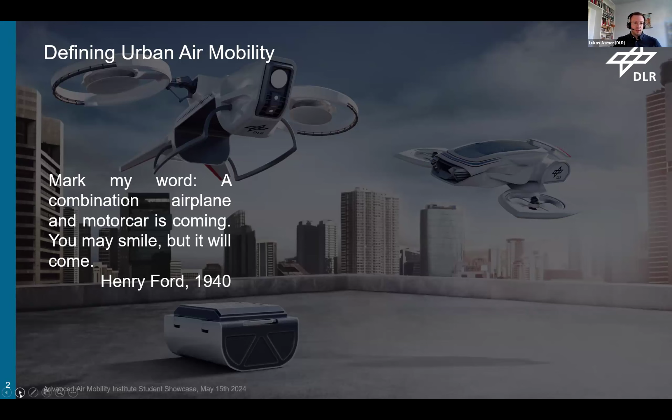I think most of you will know it, but I will summarize the whole topic of UAM with a short definition of urban air mobility by the EASA, that's the European Aviation Safety Agency, and the EASA defines UAM as follows: UAM is a safe, secure, and more sustainable air transport system for passengers and cargo in urban environments enabled by new technologies and integrated into multimodal transport systems. The transportation is performed by electric aircraft taking off and landing vertically, remotely piloted or with a pilot on board.

And they further add, commercial operations in the EU cities are expected to start around 2025 with delivery of goods by drones or transport of passengers by piloted aircraft.

And I also think many of you will know this. This is the Gartner Hype Cycle of emerging technologies. The Gartner Hype Cycle shows which phases of public attention a new technology goes through when it is introduced, and you can use it to evaluate new technologies. And as I already said, urban air mobility seems to be a real hype topic in the past years, after some well-known publications in this field, like the Uber Elevate paper, or some publications from consulting companies.

In 2019, the Gartner Hype Cycle lists flying vehicles as an innovation trigger topic. And in the years after, the news about urban air mobility multiplied, the expectations became greater and greater. And currently, I would say we can see urban air mobility in this trough of disillusionment. The picture is slowly becoming clearer. We have to realize that not all expectations maybe can be achieved, but after this trough of disillusionment, innovations can come to a slope of enlightenment and will hopefully end in the plateau of productivity.

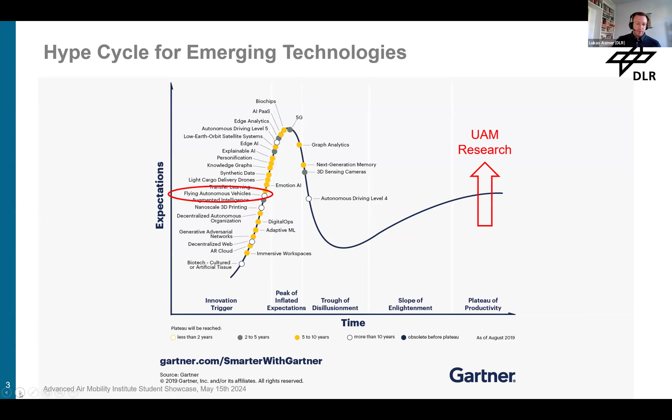And our goal at the DLR is to provide valuable contributions to better understand and design, to increase this plateau of productivity in the end. And therefore, to achieve this, it's important to view from a holistic perspective.

Because like any other transport system, it is a complex system of systems which is characterized by components that can interact in various ways. And the changes in one individual component can influence each other component in a positive, but also in a negative way. As a change in one component of a system can have an impact on the other components and on the behavior of the system in general, the system performance results from the interaction of all these components, with an impact on all relevant stakeholders like the users, the operators, the society in general, and also on the environment.

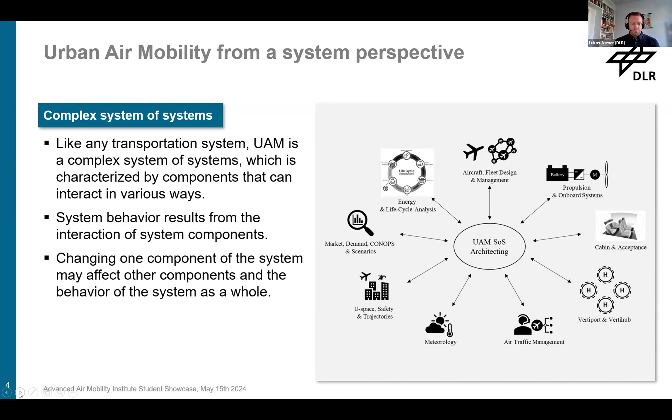In order to create a viable urban transport system, it is necessary to harmonize the individual system components like the vehicles, the infrastructure, and the operational framework, which, for example, includes the air traffic management. And in order to balance these interests of all relevant stakeholders, it is essential to compare the costs and the benefits when designing and evaluating this transport system.

The evaluation of benefits can include different aspects like the travel time or the travel speed, the mass efficiency, and the network capability. The cost on the other side may include the monetary costs, such as ticket prices for the users, but also the operating costs and investment costs. But they also consider external costs, which are, for example, environmental and social impacts, like noise pollution. And I think these external costs are a very crucial point in the assessment of new transportation modes.

In the end, by minimizing the costs and maximizing the benefits, a sustainable transport system can be created that mostly meets the society's expectations and requirements. And the challenge for us is to harmonize the system elements in such a way that the transport system is accepted by society. Therefore, the system needs to be affordable, accessible, safe, environmentally friendly, and economically viable.

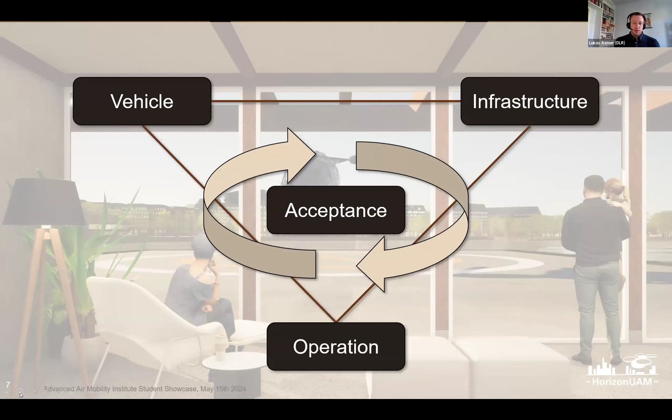The DLR has been researching various aspects of UAM, UAS, and unmanned aircraft for several years. But with the Horizon UAM project, we started the first interdisciplinary research project on urban air mobility, bringing together a lot of knowledge from different research fields to research single topics of UAM, but also UAM as a system. The project combines research about the vehicle, the infrastructure, the operations, and also public acceptance.

The main objective of the project was the assessment of opportunities and challenges for air taxis and urban air mobility concepts. The project brings together a wide variety of DLR institutes and departments to research the vision of urban air mobility.

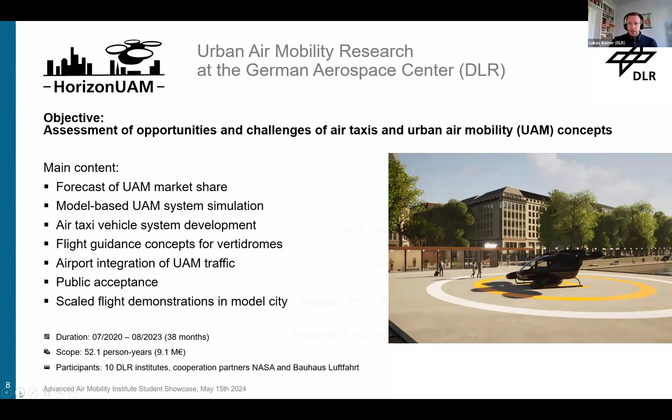You can find all these institutes here on the right-hand side. The project has a duration of 38 months and a budget of around 9 million euros. We also had two cooperation partners, NASA and the German aviation think tank Bauhaus Luftfahrt.

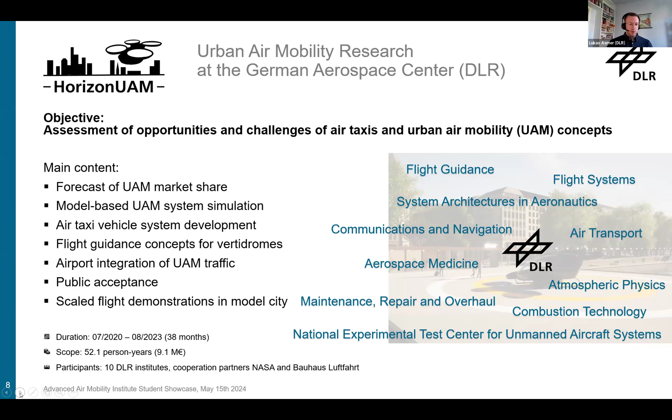In the following, I want to give you some insights into what we did in this project, and I will focus on our 5 main work packages.

I will start with the overall system simulation. This work package includes a lot of research on the operational and market development aspects, and we had 3 main working activities. We set up a system of systems simulation framework to evaluate the complexity of a UAM system and the interaction between different subcomponents.

Therefore we combined several tools we have at the DLR from different domains, like a demand tool, a vertiport tool, and the airspace management tool, and set up this simulation framework.

We also developed a forecasting method to estimate the global demand and fleet size, with a focus on different market development scenarios, and parameter studies where we evaluate the effects on ticket prices and vertiport density on the UAM demand.

We also looked at the economic viability of UAM to estimate the operating costs and ticket fares for 3 representative UAM applications, like an intra-city use case, an airport shuttle, and regional air transport.

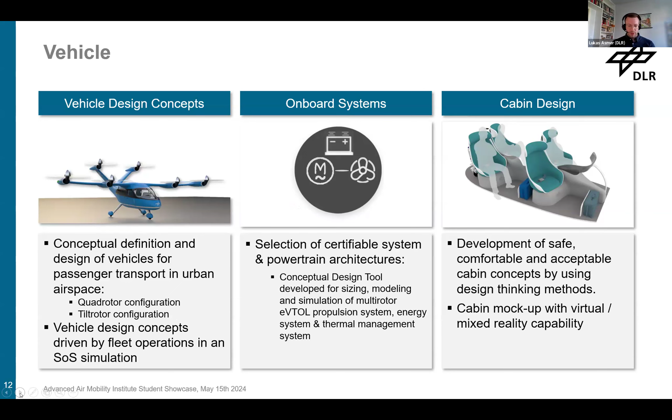Then we will come to the topic of safe and secure operations. I think safe and secure operations are one of the most important elements in aviation and also for UAM operations.

Since vehicles are supposed to fly autonomously in the long term, we put a lot of effort into the field of safe autonomy. A machine learning use case was developed for human detection, for example, on a vertiport. The main issue here is how machine learning can be made certifiable.

Within the Horizon project, we also developed DroneCast, a drone-to-drone communication system for collision avoidance in urban airspaces.

We worked in the field of multi-sensor navigation to design a multi-sensor navigation framework for UAM, which includes the ground infrastructure and also onboard units for the multi-sensor navigation aspects.

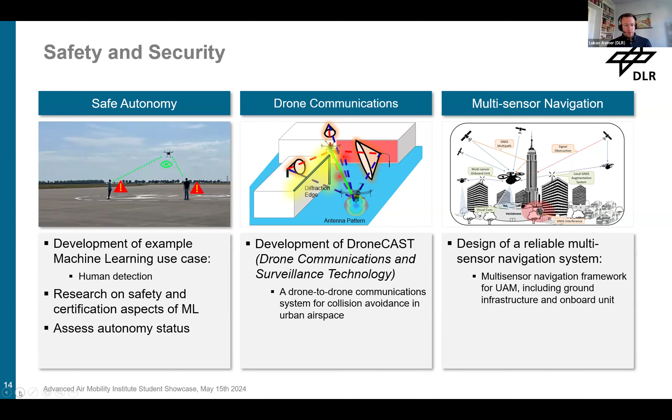Then I will come to the next main work package, and here I want to start with a short sentence which I read at McKinsey, and I think this statement summarizes the topic very well: to take off, flying vehicles needs first a place to land.

And so the topic about vertidromes, so that's a term we called vertiports and vertistops in the Horizon UAM project, are one of the crucial points for the UAM system. And in the project, we looked at different aspects.

The vertiport design: here we did fast time simulations of vertiport airside operations for different vertiport layouts. And we also developed the vertiport airside level of service framework to evaluate the different vertiport layouts.

We worked on the network management, where we developed and evaluated different network approaches, a slot-based approach and a trajectory-based approach. We also worked on network optimization under consideration of vertiport positions, available infrastructure, and infrastructure capacities.

And we worked on the integration of vertiports into airport environments. Here we did fast time simulation of the integration of air taxis into conventional runway systems. And we did real-time human-in-the-loop simulations where 10 air traffic controllers should integrate 44 conventional aircrafts and 15 air taxis per hour in an airport runway system.

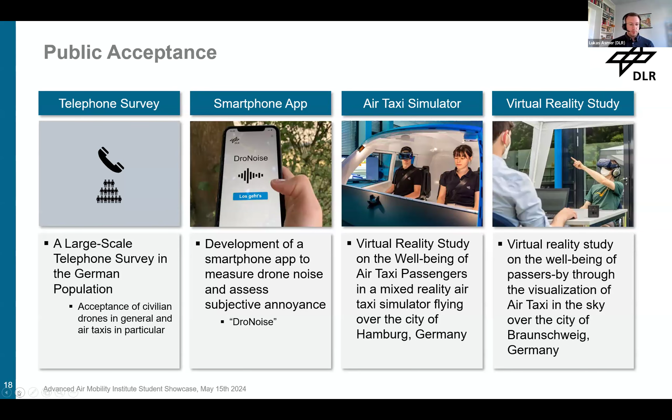And we have already been able to test some of our theoretical approaches and concepts in flight tests. Here we have excellent conditions at the DLR with the National Experimental Test Center for Unmanned Aircraft Systems in Cochstedt. It's a former commercial airport, which is now owned by the DLR, and is a test field for unmanned aircraft systems.

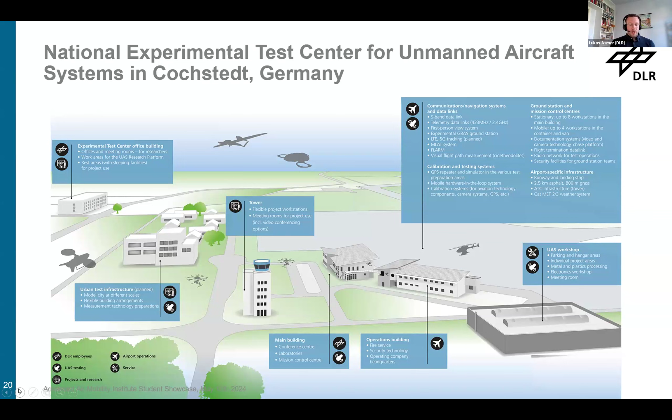And I think the important point here is that this facility is also open to external partners who want to make flight test campaigns, for example. And within this project...

We want to do some flight demonstrations, and therefore we built up a modular urban city in the scale of 1 to 4, and we use smaller multicopters to represent passenger-carrying aircraft. What we want to demonstrate was an air taxi flight within the city of Hamburg.

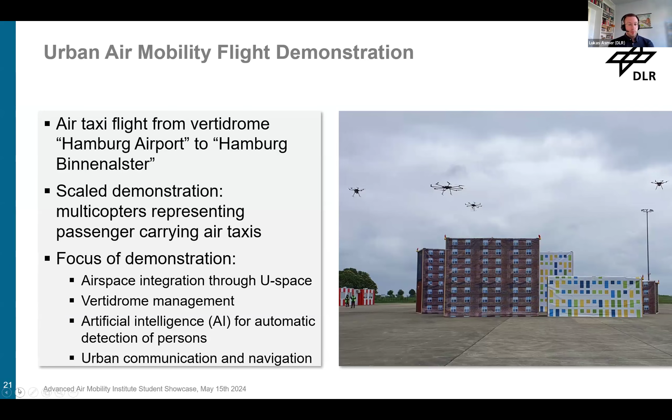The focus here was on the airspace integration through U-space, the vertidrome management, artificial intelligence for automatic detection of persons, and the urban communication and navigation aspects.

This was a very fast overview of our 38 months project activities in Horizon UAM. To summarize what we have achieved within the project, Horizon UAM has revealed the complexity of urban air mobility and the interdependencies of these system elements.

We have a lot of key results here, which are listed here. I will pick some: we have established a system of systems simulation framework, we have designed viable vehicle concepts, we have developed this DroneCAST communication framework, we have this vertiport airside level of service, and we also built up this modular city in our test facility in Cochstedt and did first flight demonstrations there.

That brings me to the main question of my presentation: can urban air mobility become reality? And I think I can break it down a bit. For UAM to become reality, it needs to be socially accepted in a broader sense.

Here acceptance includes socio-political acceptance, community acceptance, and also market acceptance. UAM has to meet the expectations of all relevant stakeholders, such as potential users, the industry, governments, public institutions, and authorities. For this, UAM needs to be designed in a way that promotes the benefits and minimizes the risks.

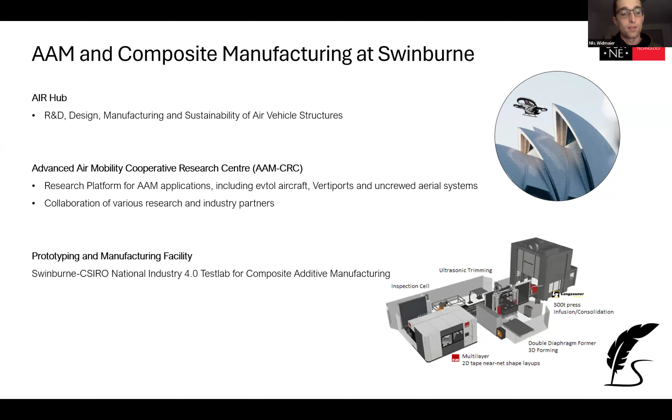Coming to my research, I'm looking at two different aspects of the just mentioned production process, focusing on dry fiber tapes. These really allow us to combine the advantages of a fast layup and forming process. First, I'm looking at ultrasonic spot welding, which is a process that you can see in the video right now. We use it to combine individual tape layers together to create a connected preform that we can then automatically move between individual production steps, not manually. This is ideal for high volume manufacturing, as it will be required for advanced air mobility, hopefully in the future, and many other industries.

I study those weld spots to ensure that we don't damage our fibers and that our tapes really stick together as we want them to be. The second part of my research looks at forming those two-dimensional shapes into three-dimensional geometries, because rarely do we have really just two-dimensional parts, right? Here I actively build up knowledge through material characterization to better understand the forming behavior of these tape materials, and this process can then be used to enhance the forming quality at the end.

Just a quick look into the work that I'm currently doing, one of the latest research findings, looking into automated forming of a rib structure, as you can find in a typical aerospace application. This geometry here is loosely based on a Boeing rib geometry, made a bit more challenging through the introduction of some more convex and concave radii. The idea was to make it as challenging as possible while still being close to a realistic part shape.

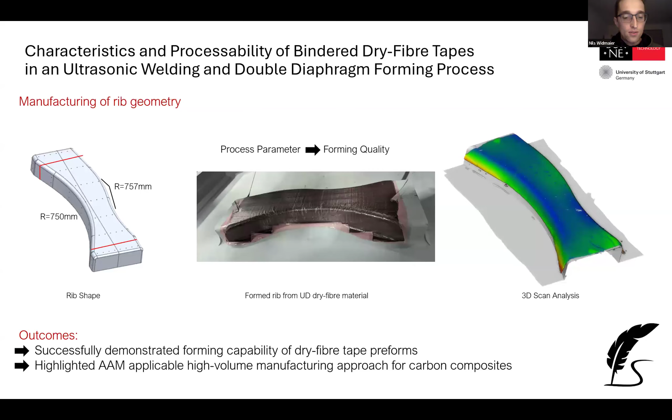So keeping it short today, this was really just a short introduction into the capabilities at Swinburne and our research into high volume manufacturing of fiber composite parts and some of my latest research results. We've proven that we can produce parts of high quality and repeatability. As we move forward, we're looking to include more aspects of a modern manufacturing process, including full traceability, part tracking, modeling approaches, and more, which is currently on the way as well.

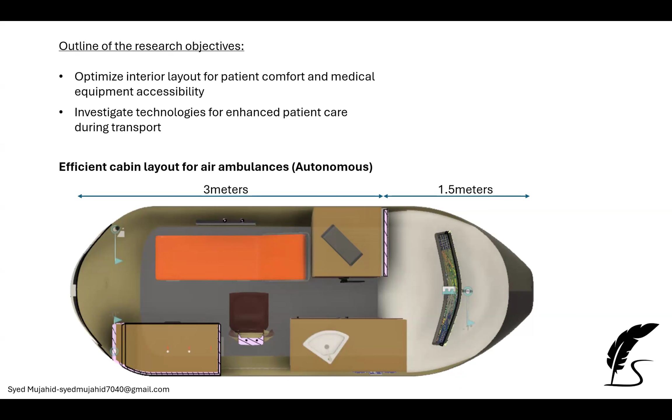In the autonomous aircraft, we have divided it into two sections. The 1.5 meters in front will be for the avionics and battery system, and the remaining 3 meters should be for the patient equipment, the patient stretcher seat, paramedic seat, and everything needed for an air ambulance.

To brief out the summary: I have designed a backdoor design to match the fuselage shape with high tolerance, a door strategically positioned for easy cabin access, a level floor design for convenient movement, a modular stretcher system, presence of aeromedical equipment meeting ambulance requirements, and an advanced screen display and defibrillator strategically placed for quick access in emergencies. The fuselage is divided into front and back compartments.

The front compartment includes, as said earlier, LED lights for focusing on the patient, and the air conditioning system for a comfortable cabin environment. Cabinets are equipped with a hydraulic door mechanism for easy operation, with ample storage space for medical supplies and equipment. The paramedic seat has side-by-side movement and 360-degree rotation for easy access to equipment and patient care, and skin material for infection control and hygiene maintenance.

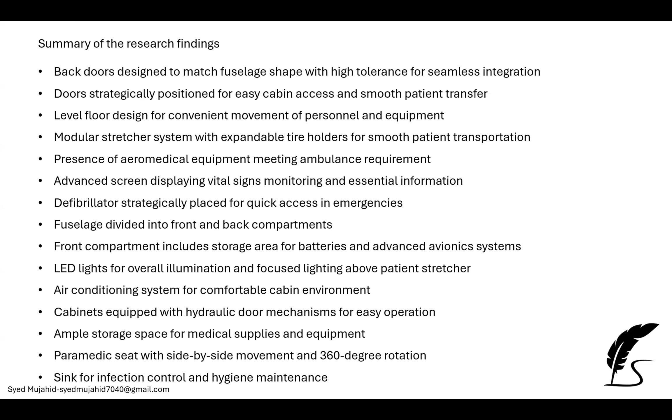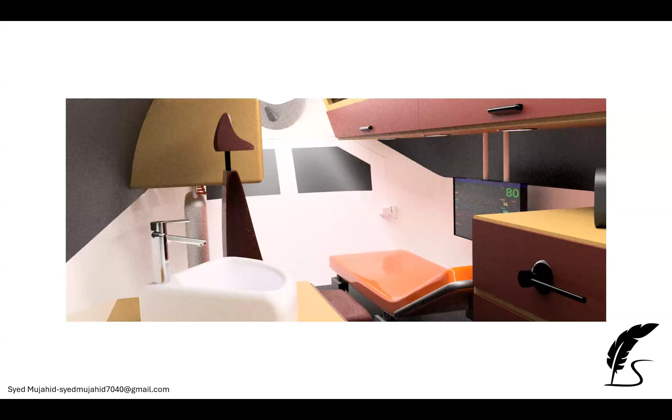I'll show you the next slide. This is an overall 3D model of the air ambulance design, showing the exterior design, and the interior where you can see the LED lights placed over the roof. This is the stretcher placed inside the cabin, with the ECG monitor display and defibrillators, and cabinets for aeromedical equipment. In front of the stretcher there is a paramedic seat for easy access.

So after all the research work, this is a summary where we have included equipment like everything needed for an air ambulance. This is an efficient air ambulance cabin to integrate into any eVTOL aircraft which has a 3 meter cabin space. So that's about the research work. Thank you.

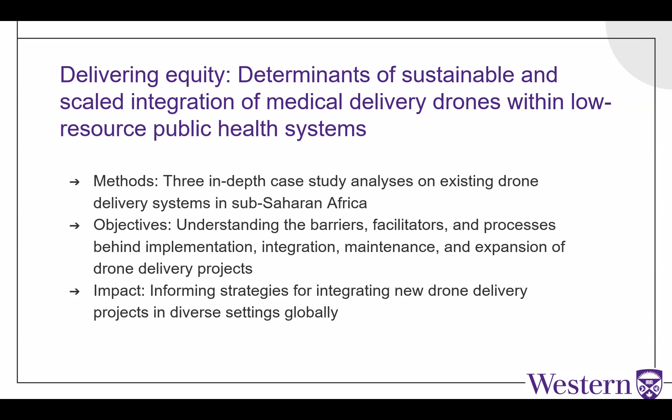So the first case is located in the very small East African country of Rwanda, which also has a very impressive health system. I'm sure if anyone knows about medical delivery drones, they've heard about this company and project. The company Zipline has been working in Rwanda since about 2016, and they've worked with the Rwandan government to create an incredibly successful, fully integrated and national scale drone delivery system that serves over 8 million people in rural Rwanda. They have an average of 2,000 drone deliveries every month with an average payload of 1.5 kilograms and an average flight distance of 100 kilometers. The main products transported by Zipline drones are blood products; however, they also transport routine and emergency vaccines and medications. This project has ample funding, including from the government of Rwanda, as well as many well-known nonprofits such as Gavi, the UPS Foundation, and the Gates Foundation as well.

The next case is located in the Democratic Republic of the Congo, or DRC, which is a very large Central African country, which experiences significant political instability and poverty. This, of course, will pose very unique challenges and requires different processes compared to other countries, even though they're in the same region, like Rwanda.

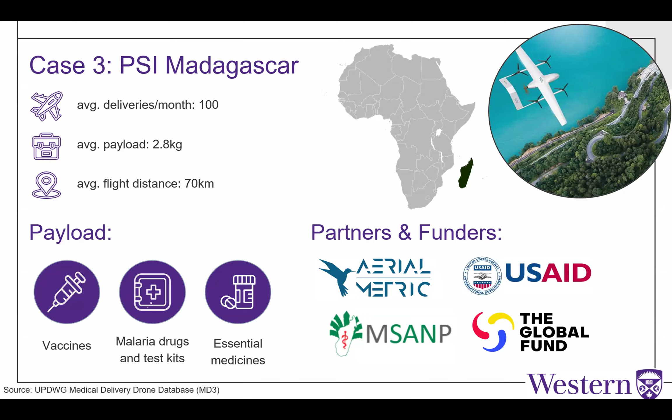Now, I hope this is going to work. I uploaded some videos, but it looks like they might not have transferred over. Okay, maybe I'll just send those to Nick later and he can distribute them.

I actually just got back from Madagascar this weekend, where I met with my partners and received ethics approval from the Ministry of Health there for my research. I took a few videos while I was there of the drones in action that I thought I'd show everyone because it's very exciting to see these drones in action, but it looks like they're not going to work. But maybe we can fix that later.

Oh. Yeah, it looks like they're just images. Sorry about that.

So what is next? I'm currently starting my PhD data collection this year, and we'll be running interviews virtually in the DRC this summer. I'll also be back in Madagascar and Rwanda this fall for 5 weeks in each country.

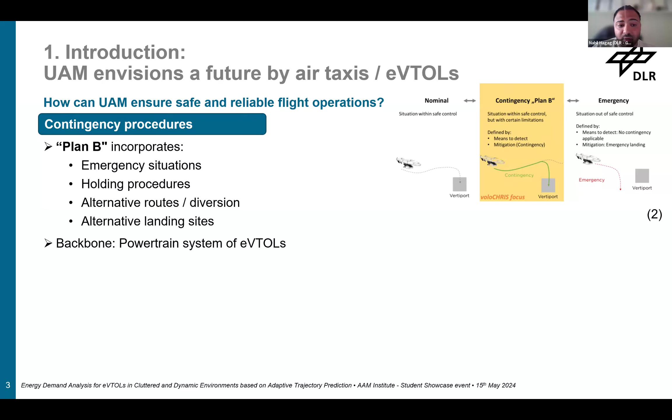I want to roughly show you a short introduction to the topic. How can urban air mobility ensure safe and reliable flight operations? We always need to consider one main point: the contingency procedures, meaning the Plan B. Plan B incorporates emergency situations, holding procedures, alternative routes, diversions, or landing sites. The main key point here is the backbone of the eVTOL, especially the powertrain.

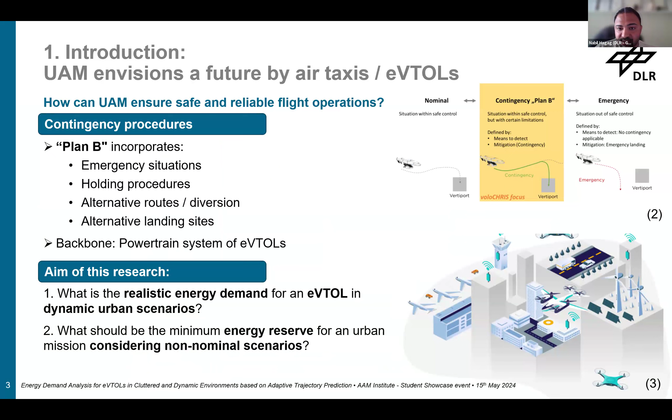So the aim of the research is to calculate the realistic energy demand for eVTOL, especially in dynamic urban scenarios, meaning to consider maneuvers and other factors, but also to calculate or recommend minimum energy reserves, considering these non-nominal scenarios or contingency procedures.

My focus for the PhD topic is especially on urban air mobility. We can divide advanced air mobility into urban and regional, so I classified it up to 100 kilometers. My focus is especially more on VTOLs, not STOL or CTOL. And propulsion types are really broad, so I consider battery, but also fuel cell and hybrid solutions.

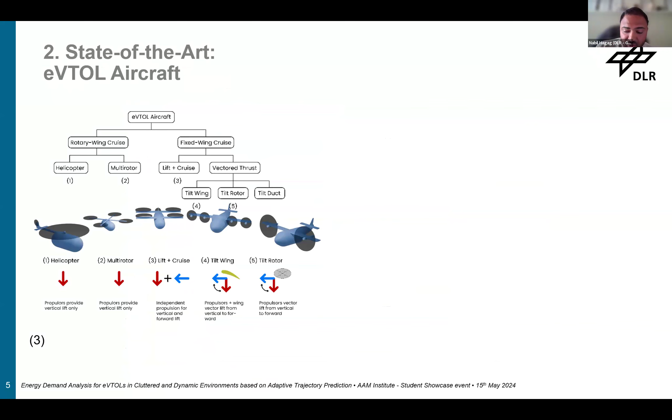For the European version, we are looking into the certification limits of the SC VTOL by EASA. I want to roughly show you a few concrete results from the last presentation I did at ICNS last month. As I mentioned, we are looking into eVTOL aircraft, and especially during this presentation, I want to show you the results focused on an operational range of about 100 kilometers with a multicopter, especially a quadcopter configuration.

We can calculate the energy demand based on the state of the art already published for helicopters, for example. I don't want to deep dive into each of the equations, but I want to roughly show you the necessary equations to calculate the energy demand.

In this calculation, I was considering lithium-ion battery with a specific energy density of around 250 watt-hour per kilogram. And based on the energy capacity, you can check as well your cell, or consider your cell discharge rate.

If we're calculating energy demand, we need to consider two different modes or phases: one is the energy demand during hover, and one is the energy demand during cruise. Later on, if you have questions about the equations, we can discuss them.

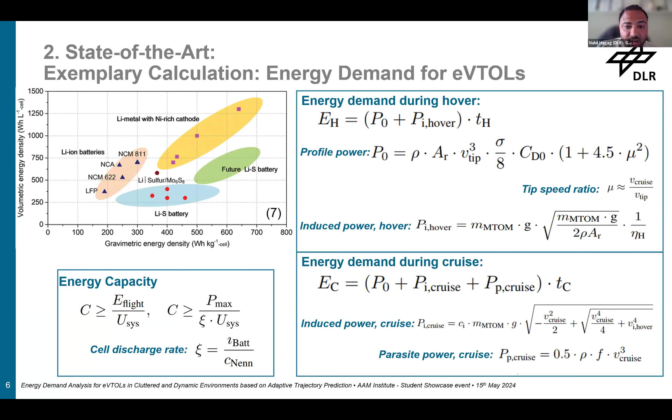But more interesting is the urban air mobility concept of operation. I mainly use the basis of the SESAR project in Europe here, the CORUS-XUAM. That was a project with different stakeholders, like Volocopter, where the demonstration of U-space services and solutions could support the UAM flight operations.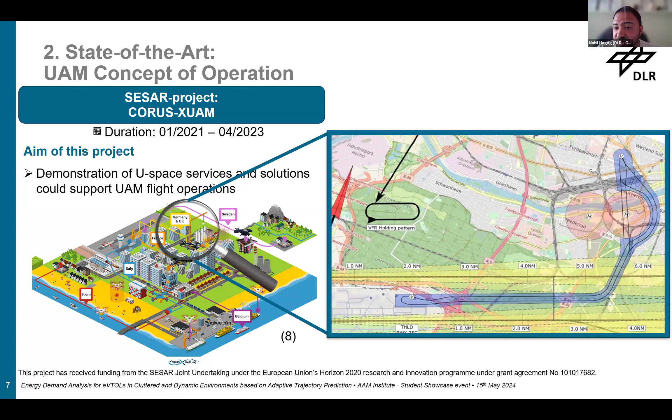For the regulatory framework, as you may know from a European side, EASA, we have several frameworks like the MOC SC VTOL or the NPA 2022-06 or the opinion number from March 2023. But in all of these frameworks, there is no regulation yet on minimum energy reserves for eVTOLs or considering contingency procedures.

More globally, the GAMA, the General Aviation Manufacturers Association, published a paper about managing range and endurance of battery electric aircraft, and they show, if we dive into that, that we need a reserve energy during our flight.

And they show as well that the power demand during hovering and landing is the most intensive part.

Based on all of this information, we try to connect all the information together in a simulation, what Lucas mentioned as well. One of that is the path planning. We have internally a program where we can optimize based on energy efficient or time efficient and energy consumption of flight planning, based on moving obstacles as well.

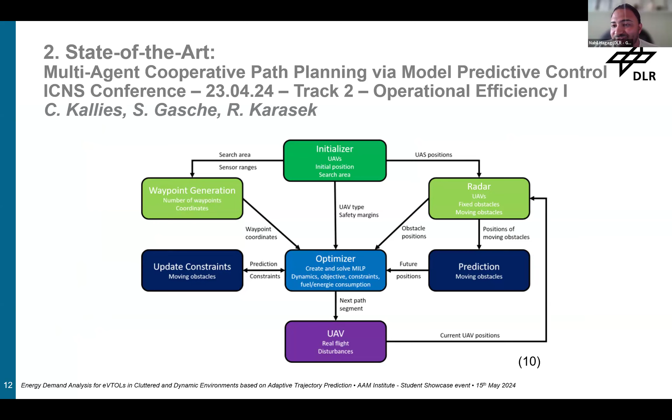This simulation is in-house, and we can set up globally all cities worldwide, because physical energy demands are basic everywhere. Just to roughly show you how the conceptual design and process to calculate this energy demand is a little bit complex, but I'll try to sum it up very simply.

So obviously we need to look at the ConOps definition, we need to check the vehicle requirement analysis, but as well consider safety analysis based on the certification that's published. And to size that vehicle internally based on another institute at the DLR. Out of that, we get a vehicle concept as a set of characteristics.

With this data, we design a flight mission with constraints, and all the obstacles we can extract based on GIS, checking a scenario. The use case here especially was Frankfurt, and out of that we get a data input, the vehicle rotor speed, and by that we can calculate the energy demand, especially.

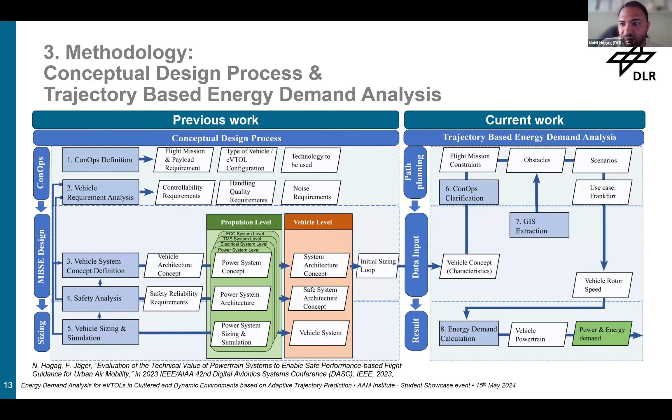And obviously with the energy demand we can calculate as well the emissions after that, for other institutes which can be interesting. For this use case especially, I want to show you some key results.

For this use case, the condition is to fly from the Frankfurt airport to the city center, which is roughly around 15-17 kilometers, with 4 passengers and a flight altitude of about 150 meters, roughly about 500 feet. No headwind speed, optimal air temperature at flight altitude, with 30 seconds of hovering for starting and landing.

And to consider as well a safety buffer to each of the buildings, roughly in total 50 meters, but we considered, based on these 50 meters obstacle buffer, navigation accuracy, and also wind effects. We considered as well in our simulations all the minimum height of buildings about 100 meters, or all relevant buildings in the area.

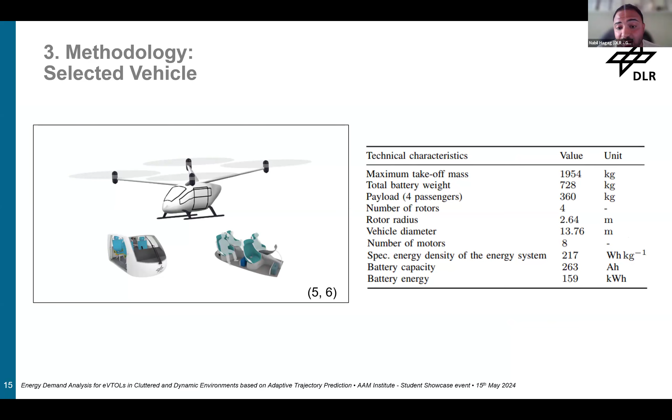Before, in the few slides before, I was showing the selected vehicle, what we can size and design, and this is a real scale vehicle, what we calculated, as you can see here, a maximum takeoff weight of nearly 2 tons, and a battery weight of over 700 kg for 4 passengers, as a quadcopter concept with a battery energy capacity of more than 150 kilowatt hours.

I just showed you that picture from the scenario, and we calculated different scenarios for the nominal flight, which is our reference, mostly clear, but we want to check what happens in off-nominal situations. So we need to check no-fly zones as well.

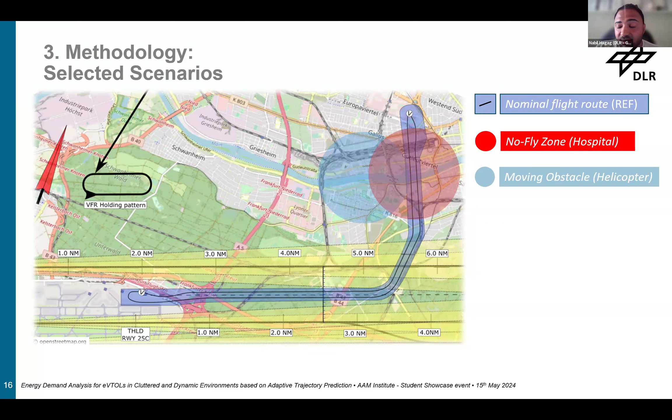That's why we need to fly around these no-fly zones, or moving obstacles like the blue circle, with a safety distance to the helicopter for example, like the target vertiport. But what happens if the target vertiport cannot be reached for any reason? We also need to define alternative vertiports, as you can see here on the other side of the river.

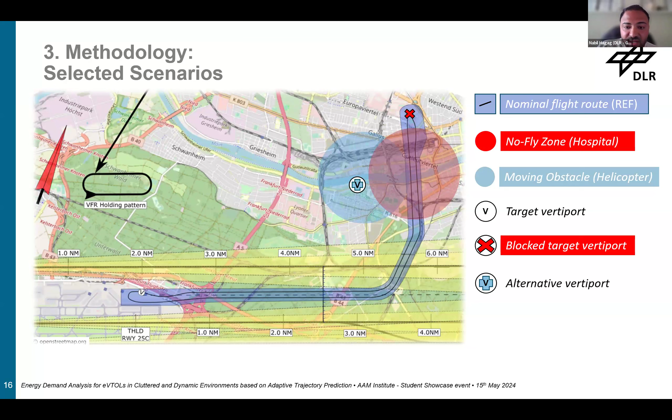These yellow lines are the SID or STAR for conventional aircraft, and that's why we need to fly from the airport terminal in the direction of east and then north. So we cannot fly directly to our target vertiport.

As I promised, I want to show you some key results because that is very important. In this case, especially in the calculation, we found that the climb phase consumes a little bit more energy than the descent phase, and each kilometer consumes, depending on your cruise mode, between 2 and 3 kilowatt hours.

Just a quick stop roughly for the eVTOL consumes 1 kilowatt hour, and each hovering of the vehicle for about 1 minute consumes more than 3.6 kilowatt hours, which is obviously a little bit more than cruise. These factors we need to consider for our missions to have a safe and reliable UAM operation.

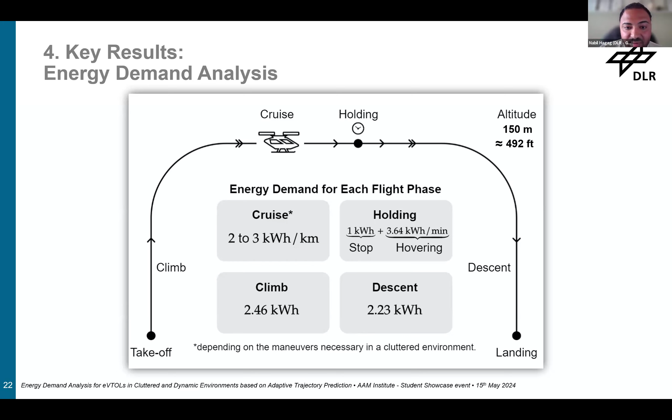What are the limitations in our calculations? Environmental factors are not considered, but that will be a follow-up, like wind or air temperature, which has a huge impact.

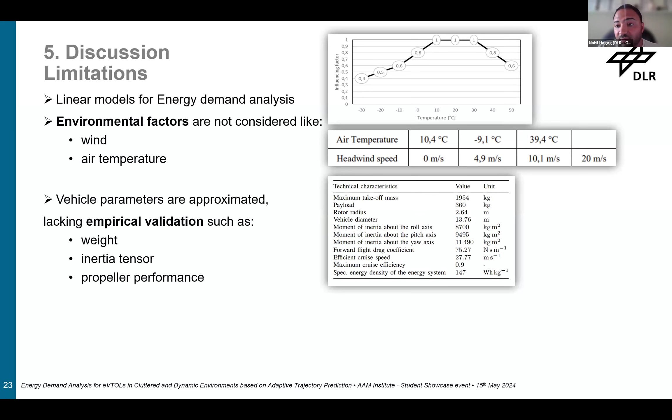As well, the vehicle parameters we just designed and calculated, but we need empirical validation with a real test scenario to calculate based on that. But I think most eVTOL manufacturers will not give us an air taxi so easily to test, even though we have the test facility in Cochstedt in Germany. And obviously for the battery model, we need deeper validation, especially on cell aging and ambient temperature.

To come to a conclusion, specific energy density and powertrain efficiency are crucial factors for path planning for eVTOLs.

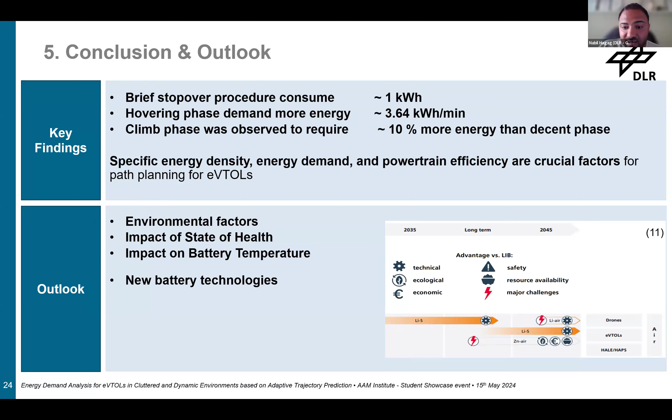And the outlook, as I mentioned, these three factors, the environmental issue, the impact of state of health and battery temperature, have a huge impact on our operational range. But also new battery technologies like lithium air battery, or the nuclear battery just mentioned in the chat.

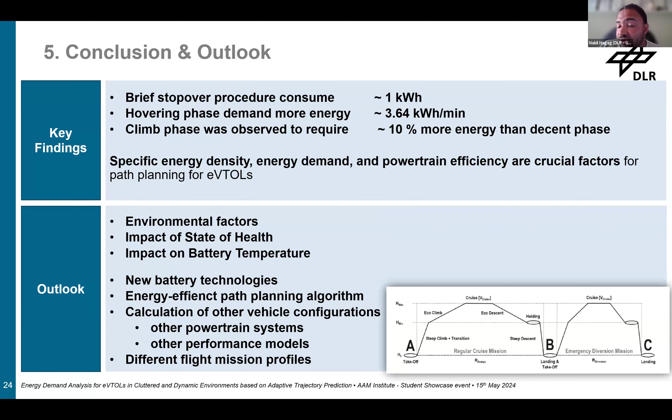We also want to deep dive more into an energy efficient path planning algorithm, to calculate other vehicle configurations, not just the multicopter, but also lift and cruise, tilt wing, or tilt rotor vehicles, as well as other powertrain system configurations like serial hybrid, parallel hybrid, fuel cell, and different configurations as a powertrain, what is the backbone of that, and obviously different flight mission profiles with different altitudes, etc.

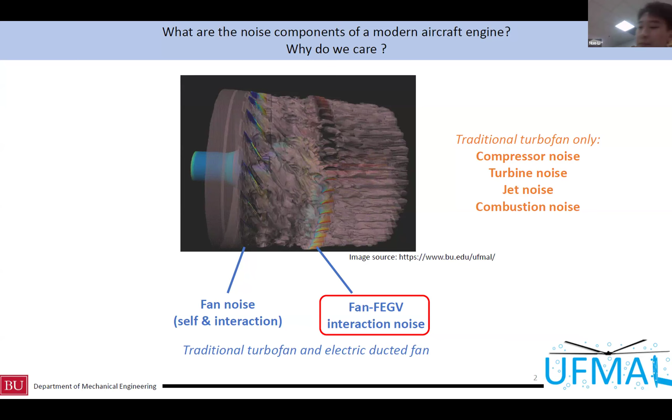Now back to the research. Simulations play a very important role in aircraft engine design, and noise, which can be seen as unsteady pressure, can be solved by a Navier-Stokes solver like large eddy simulation, or a particle collision and streaming method like the lattice-Boltzmann method. These methods are very expensive and take up to millions of CPU hours.

Low fidelity methods still play a very important role in design optimization. The particular model that I use is a semi-analytical method based on what we call the cascade model, and it is coupled to a low fidelity computational fluid dynamic simulation. It's considered less complex in physics, but it can be completed in less than 100 hours, and it's very suitable for optimization and extracting trends.

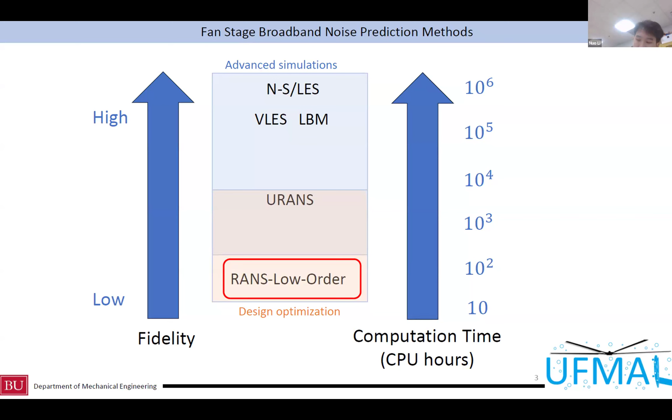Some of my recent work includes a trend study of broadband interaction noise based on factors like tip clearance, mass flow rates, and fan speeds. In another recent publication, we presented a hybrid approach by coupling a machine learning neural network model into a semi-analytical acoustic model to predict the interaction noise.

Some of my other works that are more under development are modeling the effect of non-uniform inflow and the effect of wing placement, which I'll be presenting very soon at the Aeroacoustic Conference in June. Some other work includes fan stage CFD simulation.

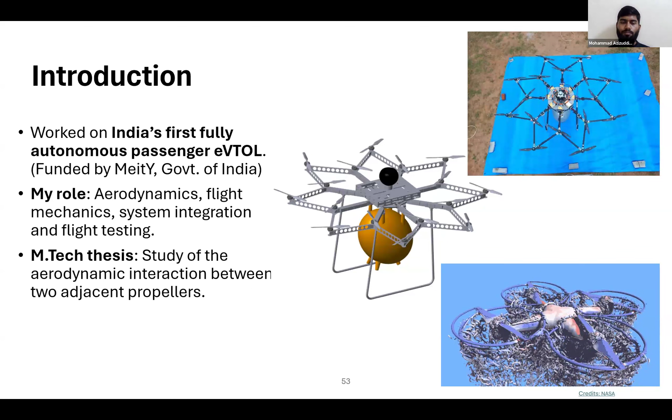So we are also powering it with an SMPS, because if we use a battery, there are chances that the voltage may drop during the operation. And if the voltage drops, the RPM may change. So that is the reason we are using a switched mode power supply to maintain a constant voltage throughout the experiment. So the key data that we are acquiring is the thrust, the torque, as well as the RPM.

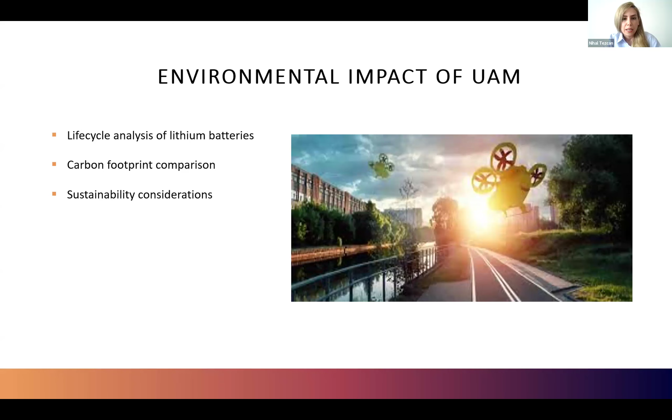And now, Vertical Aerospace is a leading British company in the advanced air mobility sector, known for its innovative eVTOL designs. Founded in 2016, the company has made significant strides in developing efficient and sustainable solutions in urban air mobility.

This company's achievements include successful test flights and securing partnerships with major industry players. Comparing their progress with global competitors highlights their position and contribution to the urban air mobility industry.

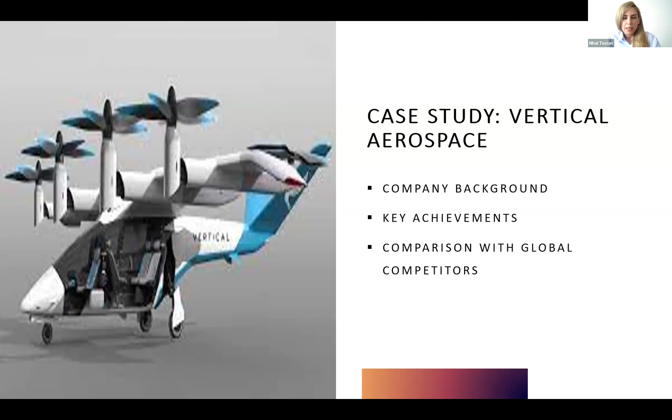During this research, I will talk about a multimodal transport system which combines various modes of transportation to create a seamless and efficient network, integrating urban air mobility with existing transport options such as buses, trams, and trains in Manchester can enhance connectivity and reduce travel time.

During this research, to understand the noise impact of different types of transportation systems, we will conduct noise measurement at several key locations in Manchester, like Piccadilly Station, Victoria Station, and National Express bus station, especially Manchester Barton Aerodrome.

By using standard methodology, we will gather data to compare the noise level of urban air mobility vehicles. These preliminary results will help us to guide noise mitigation strategy and community engagement efforts.

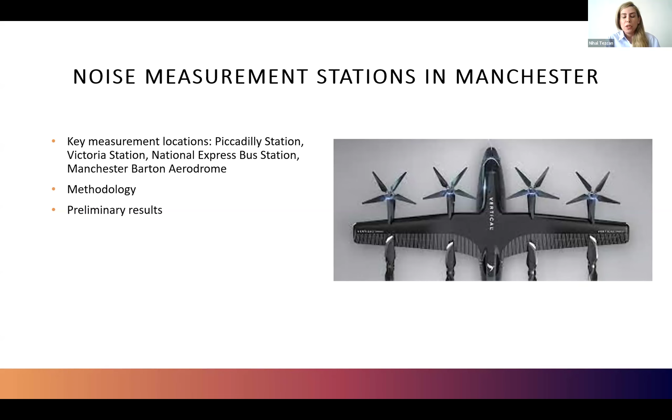Thank you so much, everyone.

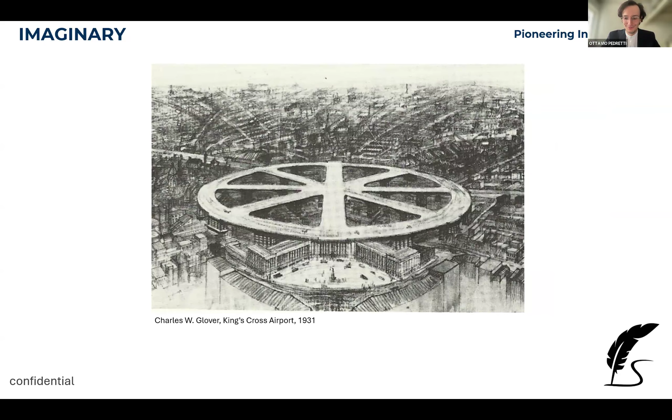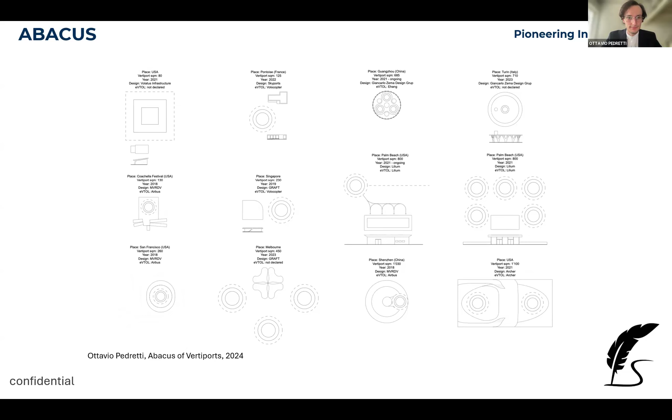At the same time, I've started to redraw all the vertiports I found online from renders. I try to understand the relation between the plan and the landing space, to understand how a vertiport is built, and to arrive at defining different design strategies to integrate the vertiport inside the city, and to understand how vertiports can activate different procedures in the city to improve the quality of the space, regenerate abandoned areas, use the interstitial spaces of the city, and also relate to the discourse of intermodality of urban air mobility with other public transportation systems.

And in particular, the case study is focused on the Napoli area in Italy. For the research, Napoli is an important point due to its geographical configuration. Napoli is in the south of Italy. Napoli is one of the biggest cities, and here we have a relation between the city and the internal area of the island that are actually very low infrastructured.

We have a lot of limitation due to the geographical condition, and the traditional infrastructure has high cost and long delivery times. So the scenarios that I'm building up are related: the first step is about emergency, to use vertiports and urban mobility to deal with emergency. The second part is related to delivery of parcels, and the last scenario is related to passenger procedures, like for touristic purposes.

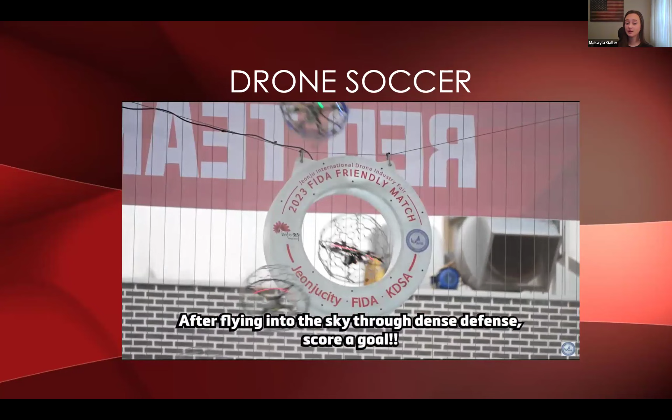Just like in Quidditch, where players have different roles like chasers, beaters, and seekers, drone soccer players have specific roles as well. In drone soccer, each of the 5 players on the team that are flying has a specific role, similar to positions in traditional sports.

The positions are the striker, the primary attacker responsible for scoring goals by steering the drone through the opponent's goal. The guide assists the striker by clearing the path and disrupting the opponent's defense to make it easier for the striker to score. The libero acts as a defensive player, protecting the team's goal and blocking the opponent's guide and striker.

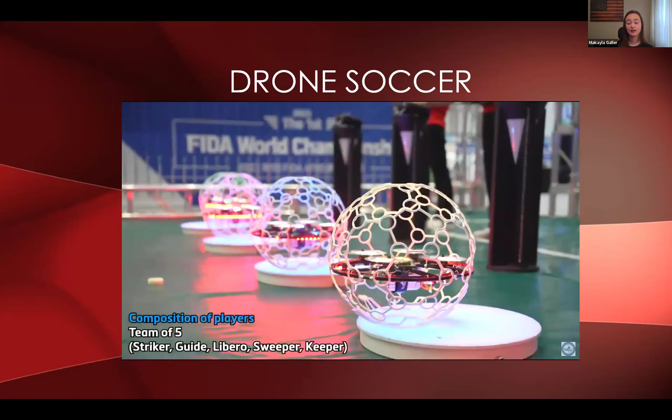The sweeper is another defensive player who helps protect the goal by intercepting or blocking opponents' drones, while the keeper is the main defender of the goal, positioned very close to the goal to block the opponent's striker from scoring. Each position plays an important role for both offense and defense strategies, contributing to the team's overall performance in the game.

Between rounds, there is a 5-minute break. During this time, the teams rush to repair any damage to their drones, replacing batteries, and plan their next moves. This break is crucial because quick and effective repairs can make a very large difference between winning and losing. It is a high-pressure situation, much like a pit stop in a NASCAR race where every second counts.

That is why having designated students within the team, which has 10 students, matters. They have designated students for reprogramming and building, while the other students are participating in the flying portion.

Now, drone soccer is not only an exciting game to watch and play, but is also highly educational. It encouraged teamwork and collaboration by combining the thrill of competition with the principles of STEM learning. Drone soccer provides a unique engagement experience that teaches valuable skills.

I can go back real quick. Oh, here we go.

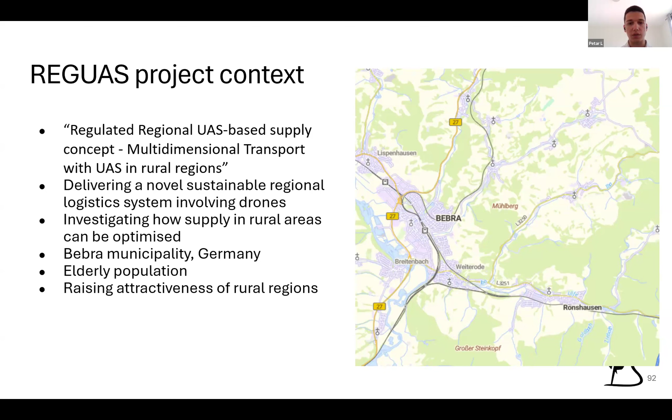Next, the REGUAS project, a little more information about it. It's based in Bebra, a municipality in central Germany. It aims to deliver a novel regional logistics system which also involves drones, complementing general logistics processes, and investigating how local supply can be optimized by implementing such a system. One other aspect of why this region was chosen is that the elderly population is increasing, as in many places in Europe especially rural regions, and the project aims to see how attractiveness can be raised for such a municipality by implementing a novel concept.

The current logistics model, as in many places, involves courier companies with local distribution centers that deliver packages which are then distributed to customers for last mile delivery. However, in such remote regions, it is often the case that a single vehicle delivers only a singular package, which is not the most efficient use of resources, and of course, environmentally, it is not the most sustainable.

The REGUAS project tries to deliver a new system, proposing that a regional distribution center be placed in Bebra, which collects all the packages from various companies and producers and consolidates them into a singular municipal system. This system more efficiently distributes packages to local distribution centers located in nearby villages, where either customers come to pick them up, or volunteers or employees pick up the package to deliver it to the last customer. It also uses drones for high value-added goods, such as medical supplies or equipment.

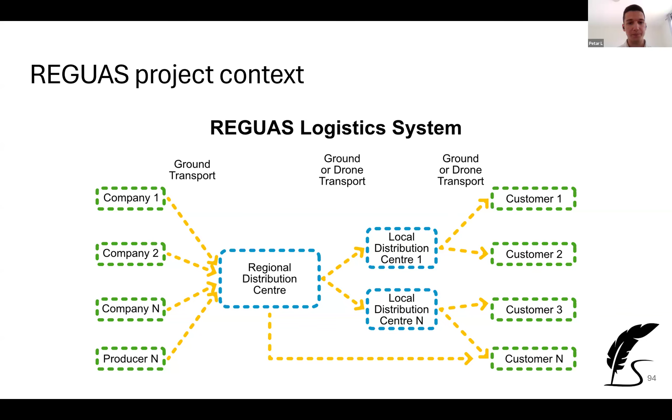In the beginning, it is planned to conduct the loading and unloading of the drones manually. However, in the future, it is planned to upgrade it to an autonomous, automatic system, to increase efficiency and response time.

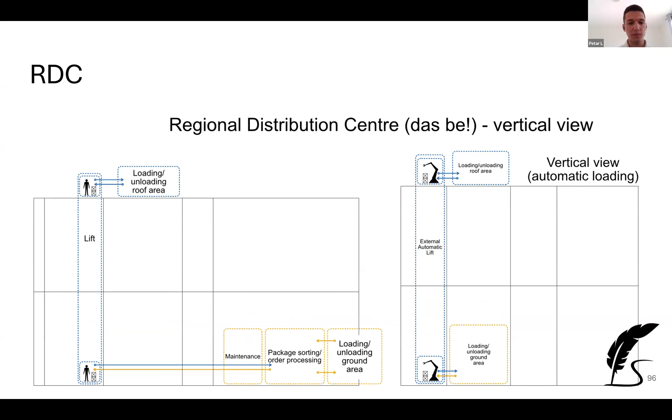The first local distribution center is located in Solz, in a shop which is also a bakery, with a parking lot where the vertiport will be located. It will serve both package storage and drone maintenance and storage, and it will also allow for ordering and receiving of packages.

The horizontal flight geography, as you can see, is primarily in a straight line. It takes into account natural reserves, buildings, villages, and important infrastructure, and the red dots are emergency landing spots, which take into account dense vegetation or nearby buildings.

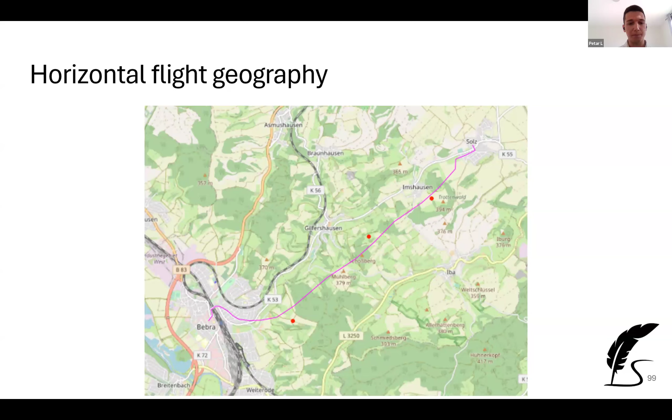The challenges and motivation for the project and thesis are, of course, the need for more sustainable means of transportation, and to get more data about the feasibility and sustainability of such operations in rural regions, especially in Europe. By sustainability, we mean the three pillars: environmental, social, and economic.

Another motivation or challenge is the regulatory processes, which can be quite strict and tedious, especially in Europe. This can lead to frustration when trying to apply for such an operation, especially when it's beyond visual line of sight.

The motivation is to develop an easy-to-follow methodology, an example for such, which takes into account the various technical, social, and risk factors as well.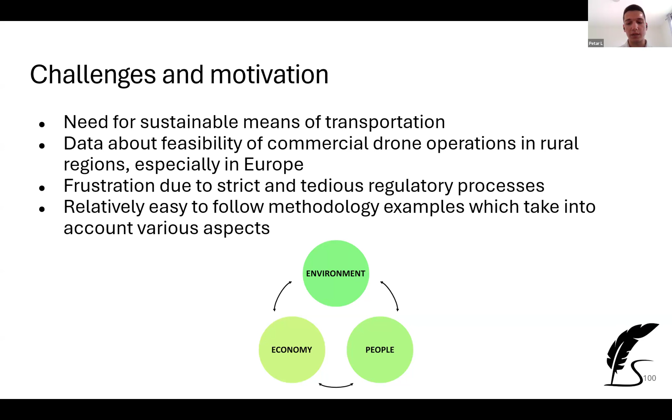So the thesis parts, as mentioned, are the rigorous context, theory and methods surveys, both public and expert surveys, the development of a concept of operation document which describes the operation, a risk assessment which is part of this CONOPS, the estimation model, which I'll go into quickly, and the flight tests and validation.

From relevant literature, it was discovered that public acceptance plays a huge role in the long-term sustainability of operation, since it can impact people's lives. Especially the ground risk is quite important, since people obviously do not want to be in danger from such operations. So both public and expert surveys will be conducted in order to gauge how well the population in Germany and in the region responds to such operations.

Then the CONOPS, also inspired by relevant literature, will try to answer important questions, such as what is the current situation and motivation, who are the direct and indirect stakeholders, what are their responsibilities, how does the operation perform, what systems does it include, how do they work, what are the risks, what are the perceived risks, and how are we planning to mitigate them.

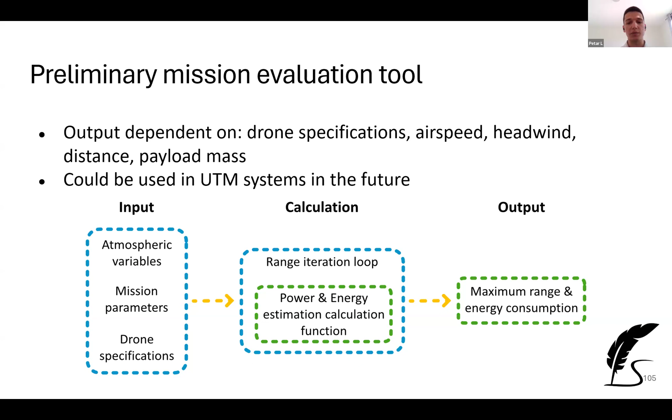Then it takes it into a loop, which depending on the configuration, computes for different parameters. Primarily, it's a function which calculates the power required for each segment and then the overall energy required for the mission.

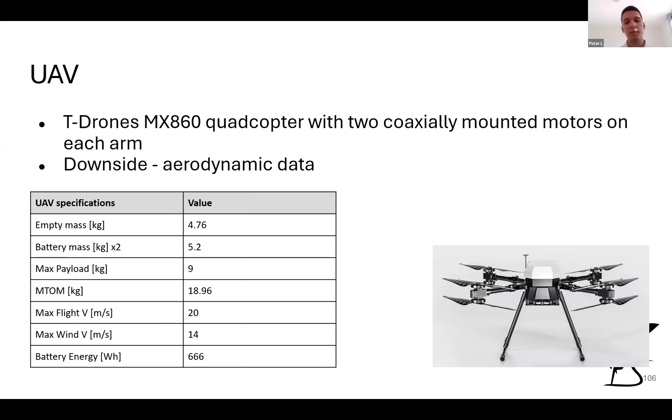This is the drone which is going to be used for it. It's a medium-sized drone at around 10 kilos without the payload. It can carry up to 9 kilograms of payload, but the planned payload for the thesis and the project is not more than 2 kilograms.

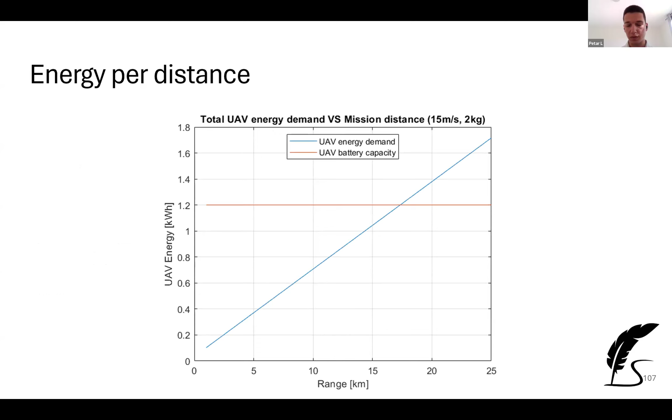Now I'll go through several initial results. This shows the relationship between the range and the energy required, and the orange line shows the energy capacity of the battery. So at 15 meters per second airspeed with 2 kilograms, the drone will be able to fly around 16 to 17 kilometers. The distance between Bebra and Zolz is around 8.

This is the payload mass. As expected, if we increase the payload carried, it will require more energy. If there is no headwind included, as in these plots, it means it can fulfill a one-way trip with even 9 kilograms of maximum payload if a case requires it, for example an emergency.

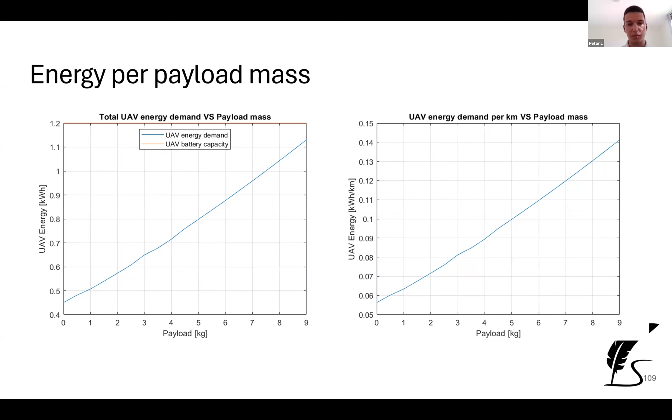This shows a relationship with the headwind. If the headwind goes above 8 meters per second, the drone will not be able to fulfill even a one-way trip, which means the headwind should be monitored quite effectively during operations.

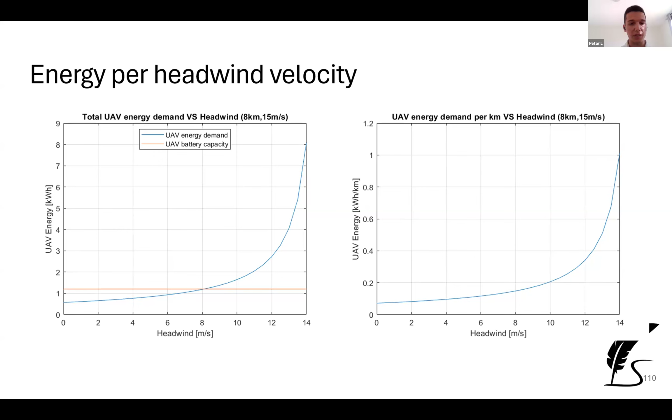And of course, we need an estimation of the greenhouse gas emissions, taking into account the average emissions from electricity production in Germany, which are around 0.5 kilograms of CO2 per kilowatt hour. It shows that for a single package, the drone produces quite a low amount of CO2 compared to a diesel vehicle.

And what is next is, of course, since it takes into account aerodynamic coefficients, the model currently uses a placeholder taken from the literature. However, further literature review needs to be conducted in order to have more accurate estimations of what the aerodynamic coefficients are, since many companies do not provide data, or they might not have it at all for their drones.

And of course, a more complete life cycle analysis for greenhouse gases, which can take into account the CO2 or greenhouse gases when producing a battery for a drone, and comparing to other modes of transportation. And lastly, the flight tests and validation of the tool itself.

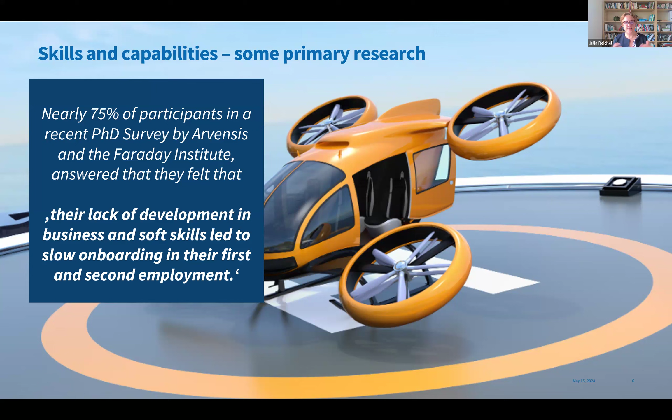And they told us, nearly 75%, that they really struggled in their first and second proper appointments post-grad with the lack of business skills and the lack of soft skills. And that is what I wanted to focus on today. And of course, here we are.

So you guys are all in masters and PhD programs, and you know better than I do your technical skills. You might be aiming to be a battery scientist or an engineer of some description. Maybe you're training to be in AI, simulation, airworthiness, law. Maybe you want to become a pilot. Those skills are captured in the capability frameworks of your future employers, and if you don't meet that basic criteria, you won't get an interview.

We talk about teamwork, but how do we define teamwork? What are the facets of teamwork? Teamwork is conflict resolution, it's mediation, accountability, collaboration, anything that allows you to operate and let your team thrive.

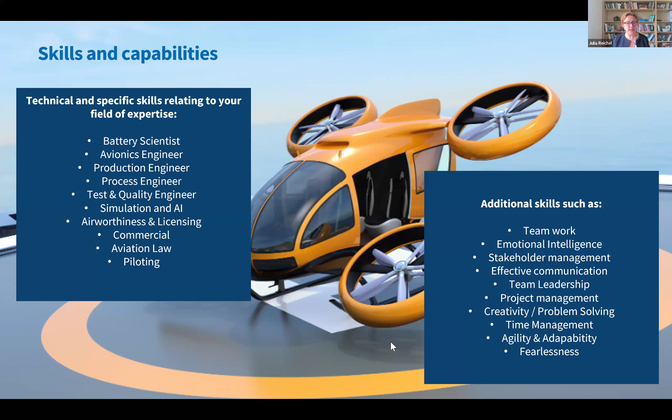And then the last one, the adaptability, the agility, and the fearlessness. You are in a sector that is fast growing, you're pushing boundaries all the time. So any of you who are in tech will know the term fail fast, learn fast. So resilience, flexibility, a growth mindset, and reframing failure to just having had a go and trying something new.

Last but not least, with a little bit of time we have left, I wanted to send you on your way with a couple of tips around interviews. First and foremost, when you go and meet a potential employer, really do your research on the people you're meeting, know their career path. We're in a digital age, everything is transparent, so really make sure you know who you're meeting. Prepare for competency-based interviewing.

You will be asked, especially as you're entering your career, competency-based questions for the skills I've just listed. Describe a time when you worked effectively in a team, when you had to really push your communication skills. Write yourself little answers, little case studies, be ready for those kinds of questions, because when you're not prepped for this, they can be quite overwhelming. You will not be asked, are you a good communicator, because the answer would obviously be yes. You will be asked, tell me about a time when you used that and what the outcome was.

Take notes during the interview, yeah? Always have your pen. Show the people you're talking with that you're taking notes, that you're serious about this. Breathe and take time. I never do, and I always preach. So breathe and take time.

Move on to the business level, yeah? So ask questions about the business plan. Ask what your role is contributing to this great goal of the company. Every company has a vision, a mission, and a value statement. So make sure that you let the interviewer know that you're aware of that, but you want to know what you're doing to contribute to that big goal.